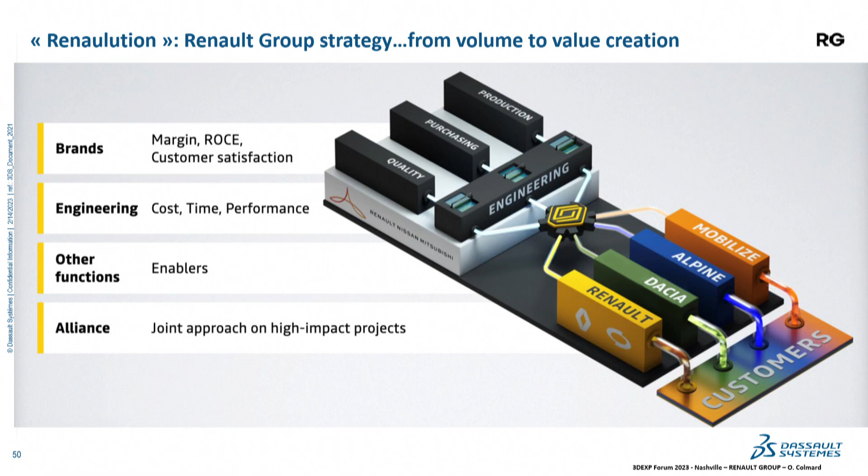700,000 units by 2025. The Renault Group has launched its Renaulution, the new group strategy based on moving from volume to value creation. For engineering teams, the challenge is efficiency in cost and lead time development reduction in order to put time to market at the best world level. One objective is to switch from a car company using tech to a tech company designing cars.

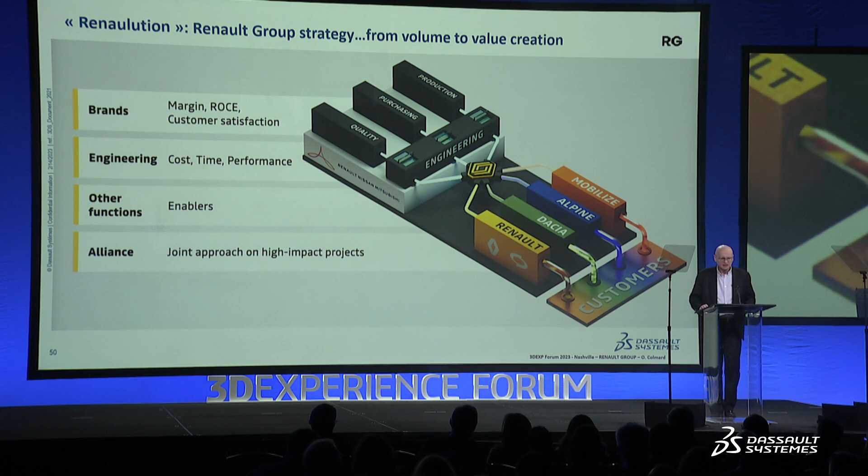In this context, digital strategy is key. We want to be at the best level in the industry in terms of digital twin. This is why our program is called Renaulution Virtual Twin.

With Dassault Systèmes, it's a long journey. We have been partners now for more than 20 years. Pioneer in the 90s with the CAD adoption. In 2010, we launched a huge transformation called New PDM, the first world player in V6 technology. It's a first step to the 3DEXPERIENCE.

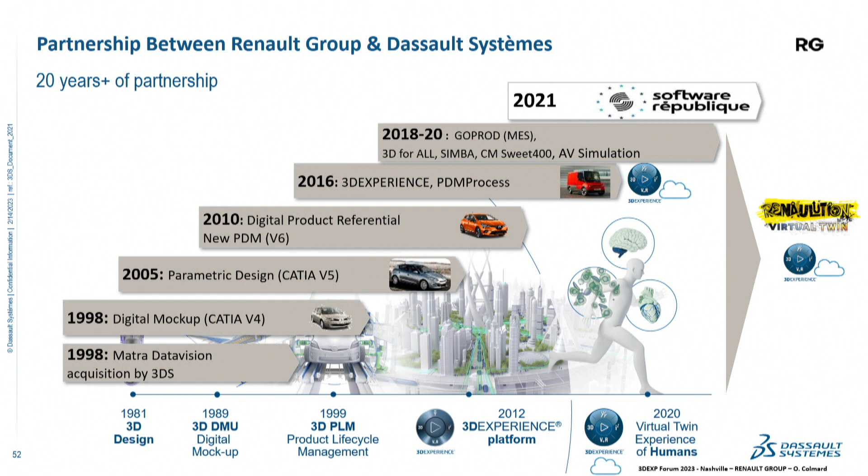And end of 2021, we decided on a new breakthrough with a large adoption of the 3DEXPERIENCE platform on the cloud. Why this transformation? Automotive industry is facing some major challenges.

Switch to EV and new energy, exponential growth of complexity due to systems and software, embedded or off-board, and always higher levels of regulation compliance constraints.

This is why we decided to invest in a strong backbone to manage upstream data, the single source of truth for all métiers. And we build it around 3 pillars.

First pillar is robust and agile product process design. The second pillar is transformation in system and software management, including configuration management and MBSE approach. And the third pillar is collaboration and data sharing.

Another objective is to suppress silos, switching from engineering PLM to a cross-company virtual twin with access to data coming from all the business lines. We want to provide definitively a single source of truth for all the métiers.

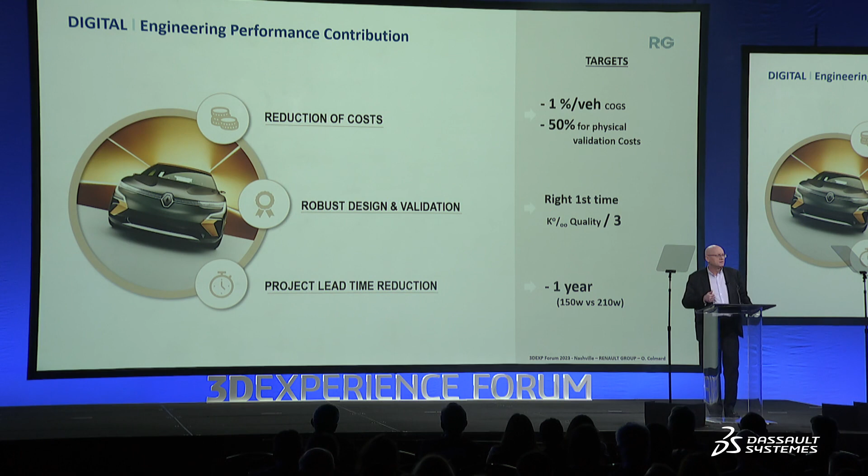We expect a lot of value creation from our digital strategy. Reduce cost with less expensive prototypes, more simulation, less physical testing. This is the shift left approach.

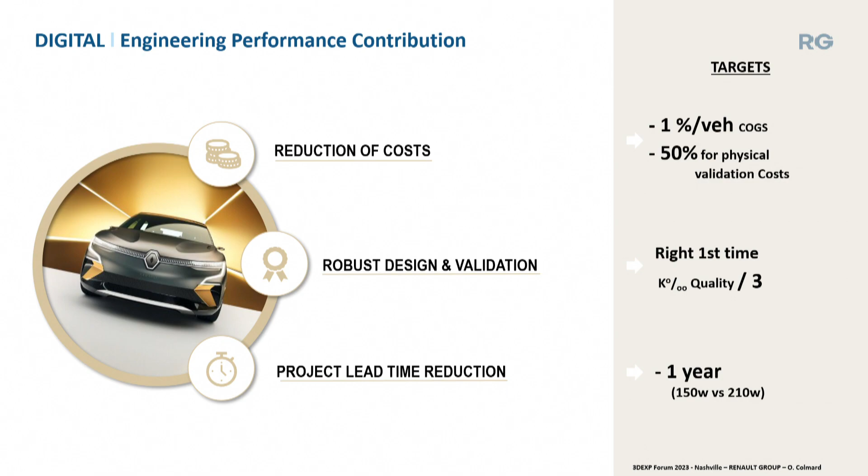We want also to improve quality of design in order to be right first time when you go to the physical phases. We want to contribute to time to market with a drastic reduction of the project lead time, minus 1 year.

How to leverage this value? Let's see some examples from our 3 pillars. If you start with the first pillar, robust and agile product process design, today designing a new car is a 4-year journey from the initial idea to the product.

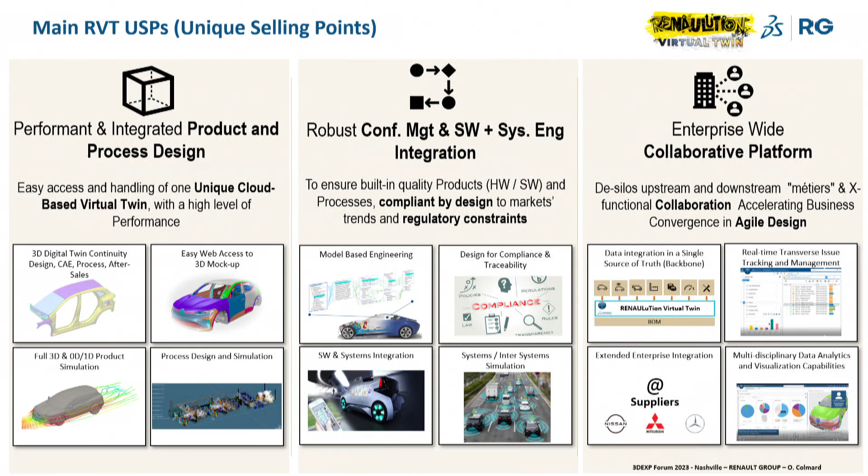Then come the first physical prototypes with the huge investment in tooling after a digital phase. And this digital phase represents 50%. Each problem that you can solve during the digital phase is a huge saving of money and time compared to the late modification. We have many initiatives to reach this goal.

One is 3D for All. Today, if you want to see a 3D representation of the virtual twin, you have to be a CAD or CATIA specialist with a dedicated workstation. If you are not, and if you need the car, you have to ask this guy to show you the car.

The idea is to give this access to all the project team members. All of Renault Group today, all Renault Group range, is already available, and we've trained more than 4,000 people to use this tool. Let's see it in a short video.

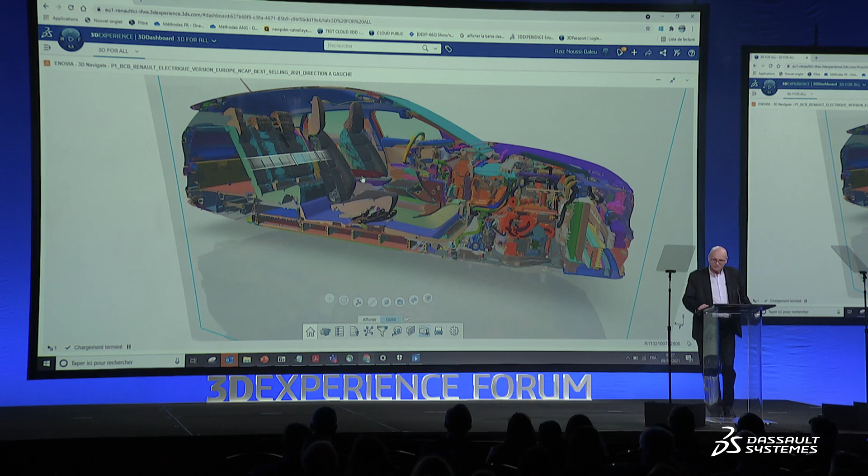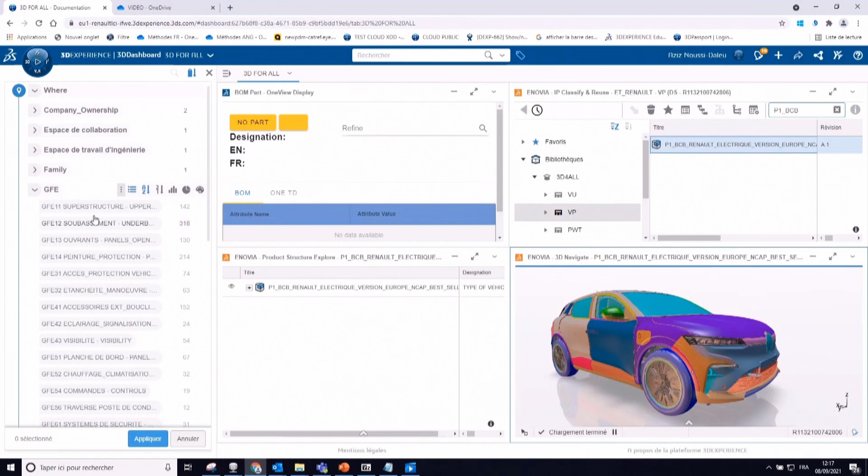So we are in the 3D Experience platform with the brand new Megane E-Tech EV in Europe. In this platform, most of the 3D functions are available. For example, we can make a section view, and the user can choose his environment on a normal PC, using web technology. When you select a different type, you can obtain, in this case, the Alliance CMF-EV platform.

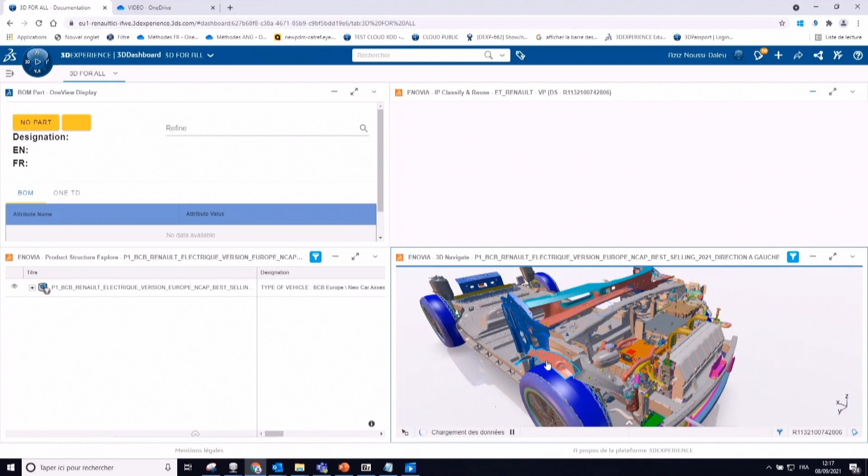With selection of a particular part, I can have access to any information, whether this information is in the platform or not. In this example, I chose some BOM information, bill of material, but it could be quality, purchasing, or costing information.

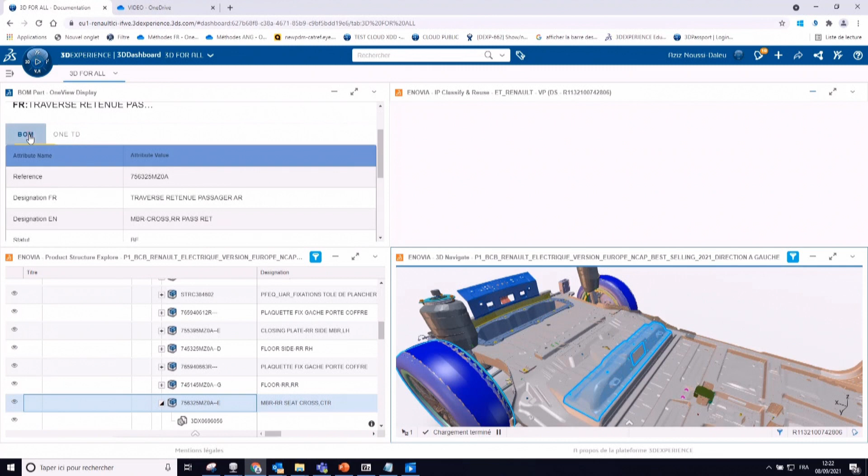For example, if I want to see different information, such as the weight, I can directly access this official information. From the same interface, I also have access to issues.

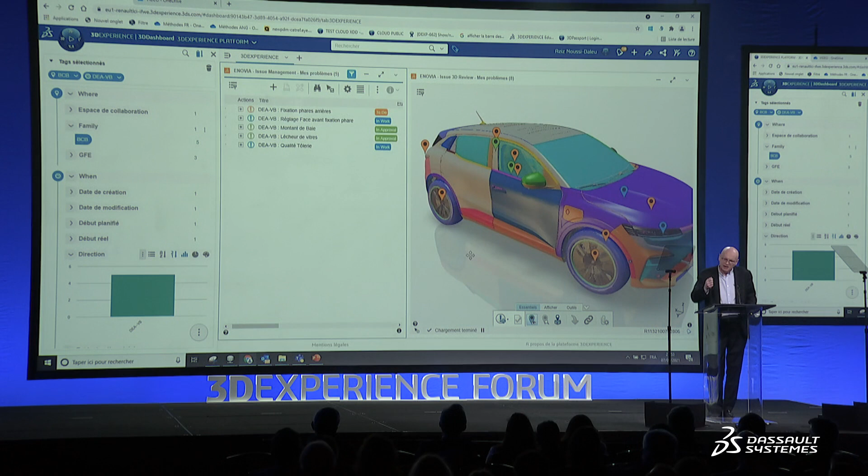With a set of functionality, we can, for example, have the repartition by business line. We can also zoom in on the body perimeter in this case. And as you can see, we can show an illustration of the issue, and we can very easily work together.

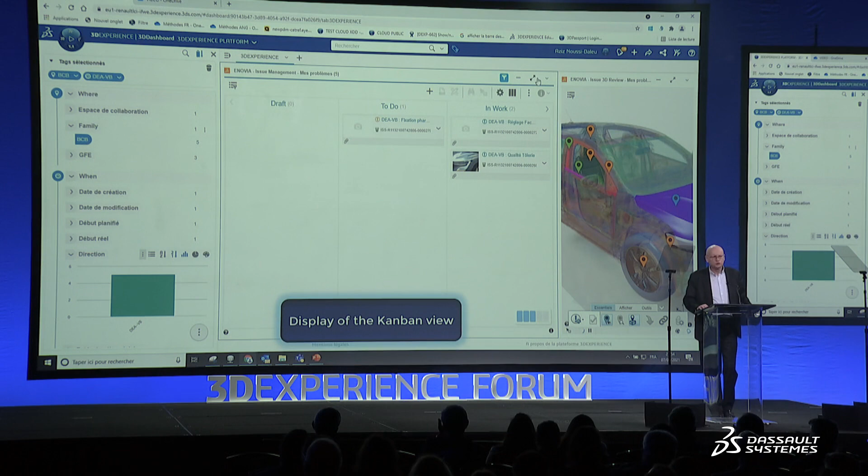We can also have the Kanban view of the issues for all collaborative tasks. So it's a very powerful tool to increase productivity and collaboration between teams. And finally, our Megane E-Tech realistic rendering mockup is done with 3DEXCITE, based on the same CAD data.

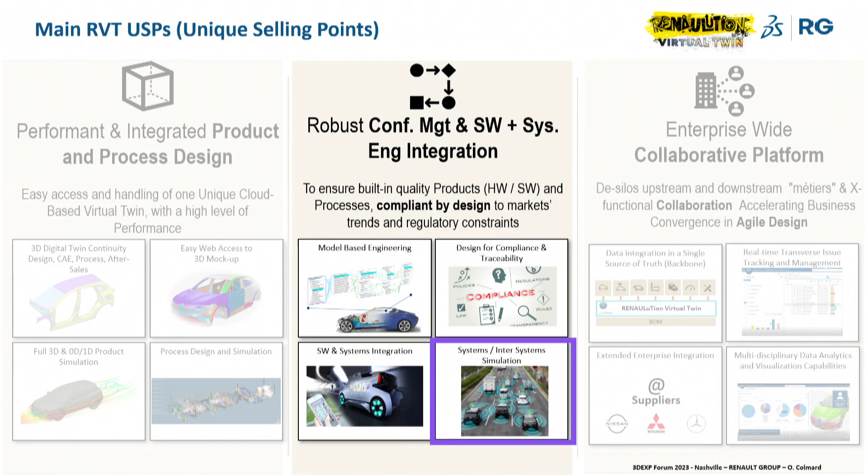The second pillar is system and software transformation. In the car industry, without strong systems engineering and robust configuration management, it's impossible to face new complexity, and impossible to ensure regulation compliance and traceability from requirement to validation and now to certification.

To be sure that your system design is robust, you have to make system and inter-system validation thanks to simulation. This is the objective of CATIA SCANeR from AV Simulation. Let's see a short video.

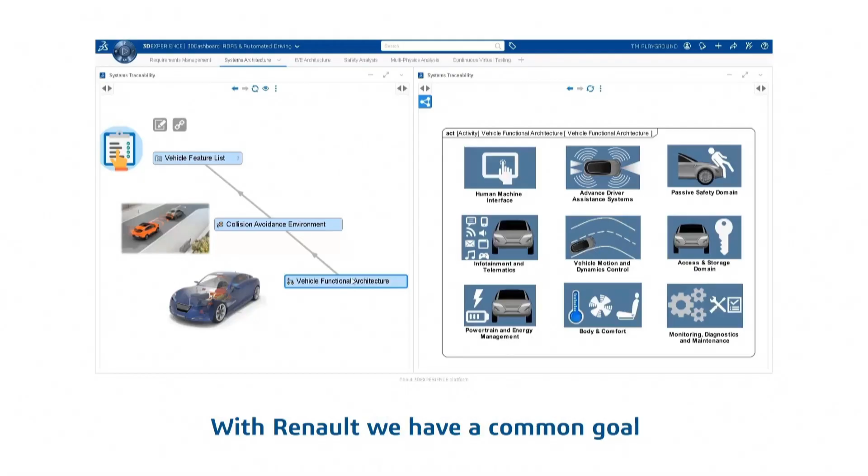Our products become more and more complex with connected, autonomous and electrified vehicles. At Dassault Systèmes, we develop industry solutions for advanced driver assistance systems and autonomous driving development. With Renault, we have a common goal to engineer autonomous systems that will be free of bugs when the real vehicle hits the road.

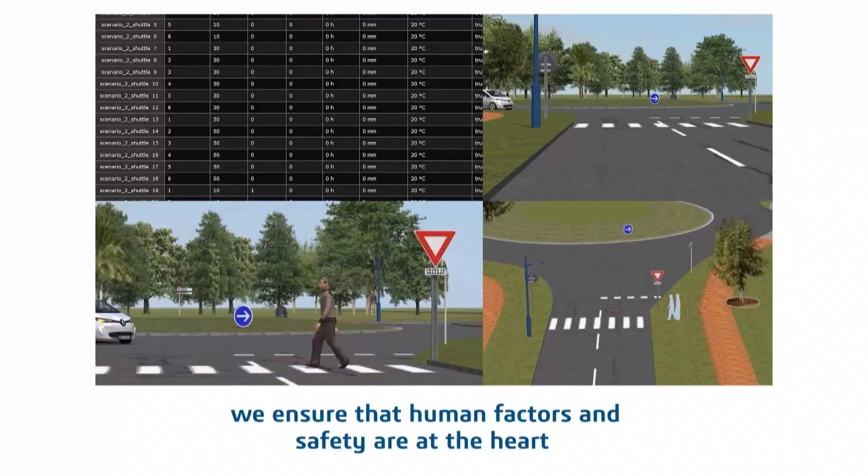We are partnering with AV Simulation to run massive simulations of autonomous driving scenarios on the cloud. AV Simulation builds the most advanced driving simulators. We ensure that human factors and safety are at the heart of tomorrow's mobility solutions.

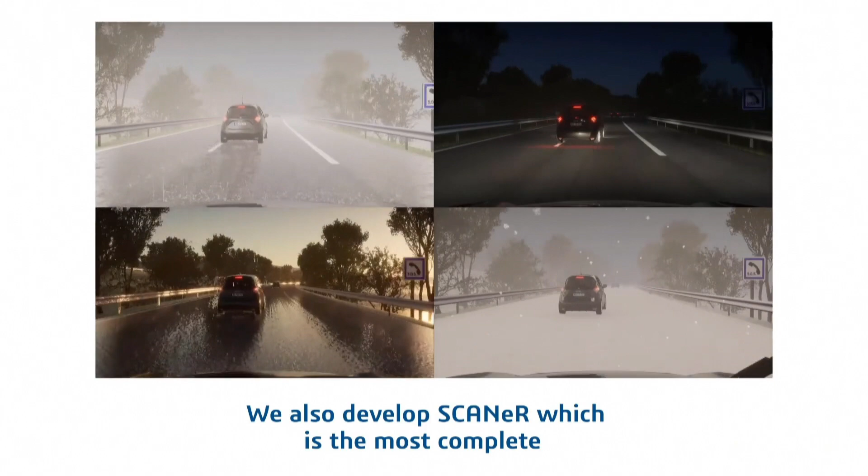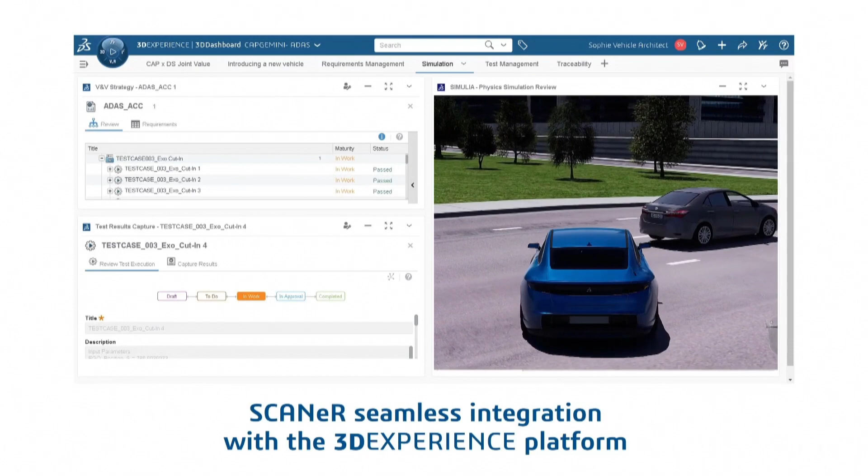We also develop SCANeR, which is the most complete driving simulation and validation software, thanks to its headlights, sensors, traffic, compute, and explore features. We allow mobility players to drive millions of realistic virtual miles to reach first-time-right. SCANeR's seamless integration with the 3DEXPERIENCE platform is a game changer towards digital transformation.

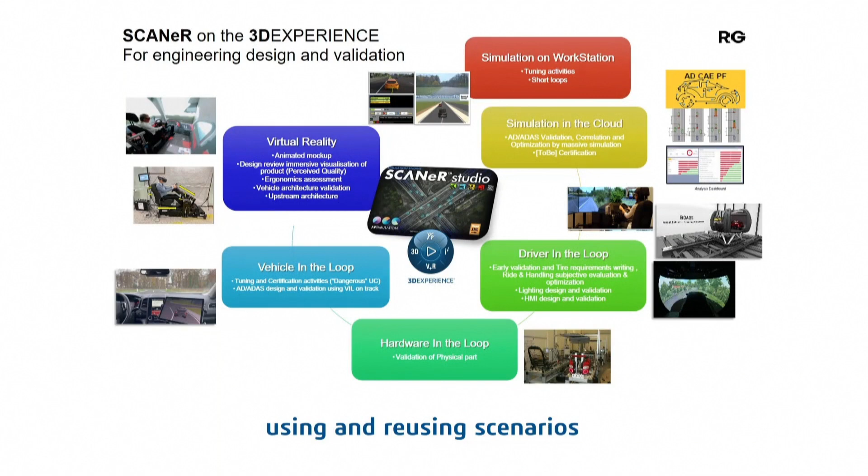Renault and Alliance teams are using SCANeR to support vehicle-level simulation activities. The workflows based on SCANeR enforce a digital thread, using and reusing scenarios as well as running different types of vehicle models. It is used in an agile process for verification and validation with digital and immersive platforms at any phase of the project.

SCANeR, together with CATIA and the 3DEXPERIENCE platform, is the foundation of the compliance of the Renault vehicle digital twin. It creates traceability to run baseline simulation.

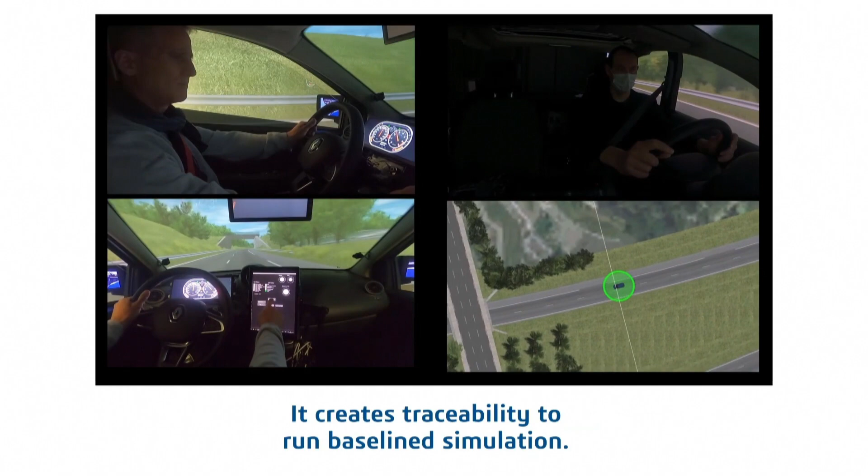The digital chain, based on SCANeR as orchestrator and 3DEXPERIENCE for virtual twin management, is key to design and validate complex systems by simulation. It shifts the effort to early development phases with digital, reduces prototypes by more than 50% in cost, reduces lead time, and finally improves the quality of design and validation for complex systems.

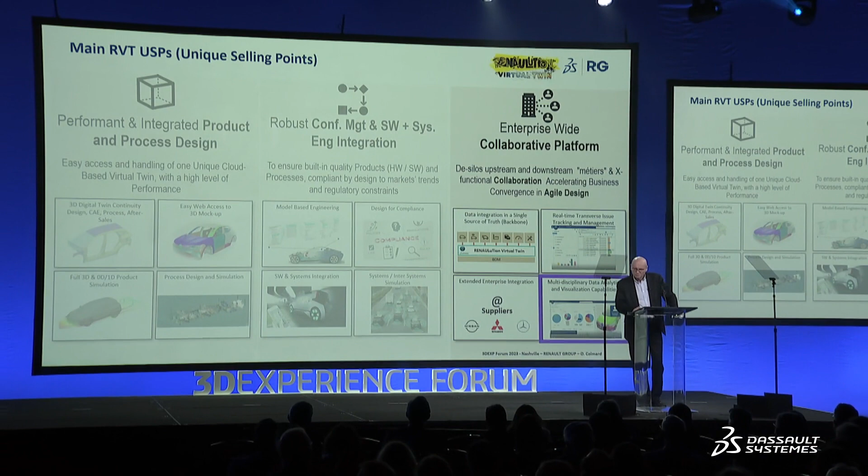So in the last pillar, we manage collaboration and our strategy on data: Extended Virtual Twin, XVT. XVT is a tool based on NetVibes technologies.

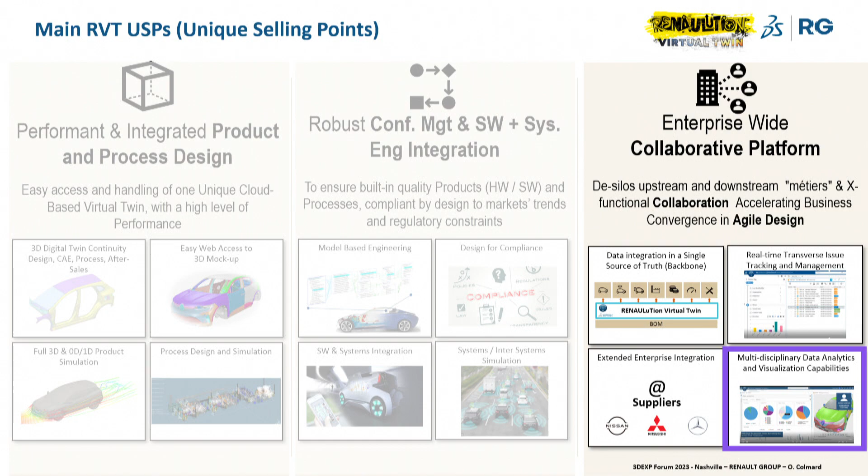The objective is to create a dashboard or cockpit called Data Perspective, mixing on one side data managed inside the 3D Experience platform, including the 3D digital twin, and on the other side, data coming from any legacy tools outside 3D Experience, like purchasing, costing, quality, manufacturing, after-sale, etc.

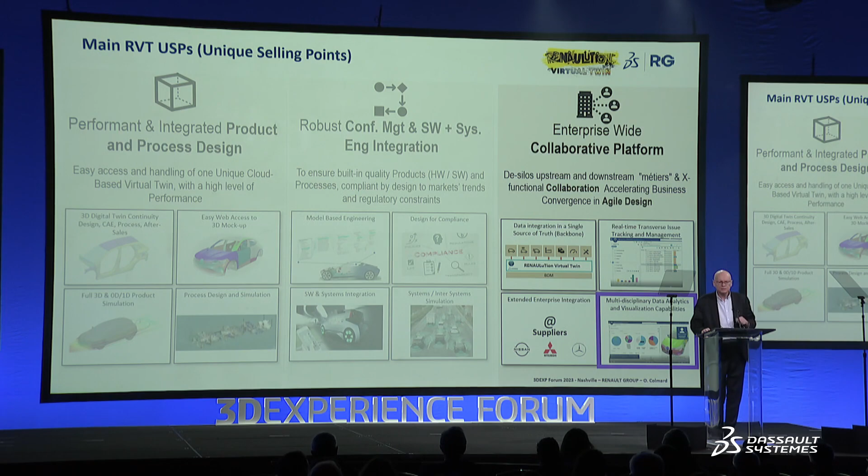I will show you a short video of one of our use cases. We have many others. We call it Digital War Room in Renault. A war room is a cross-company team looking for price reduction opportunities.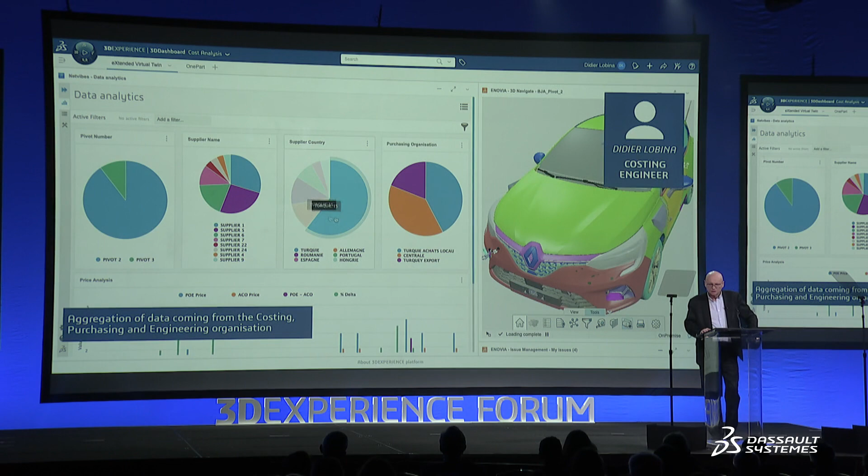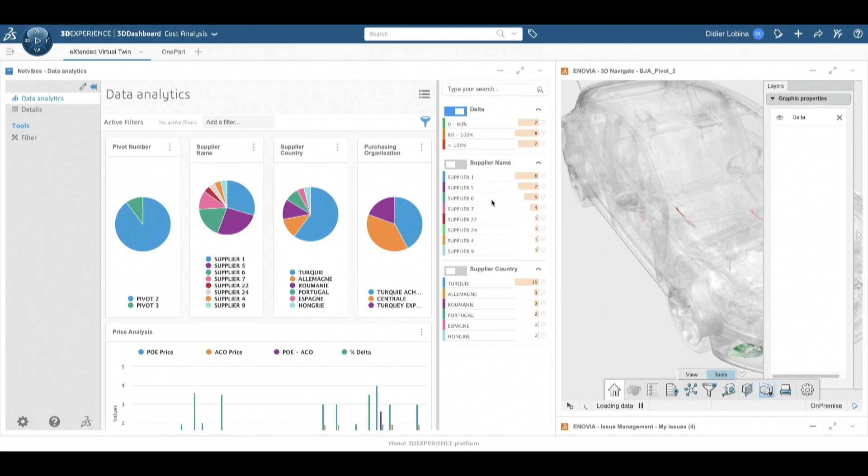So we start on the costing. We are in the costing team, and on the screen, data analytics are on the left, and as you can see, PLM and digital mockup are on the right. The objective of this tool is to track the gap between the real price and the target price given by the costing team.

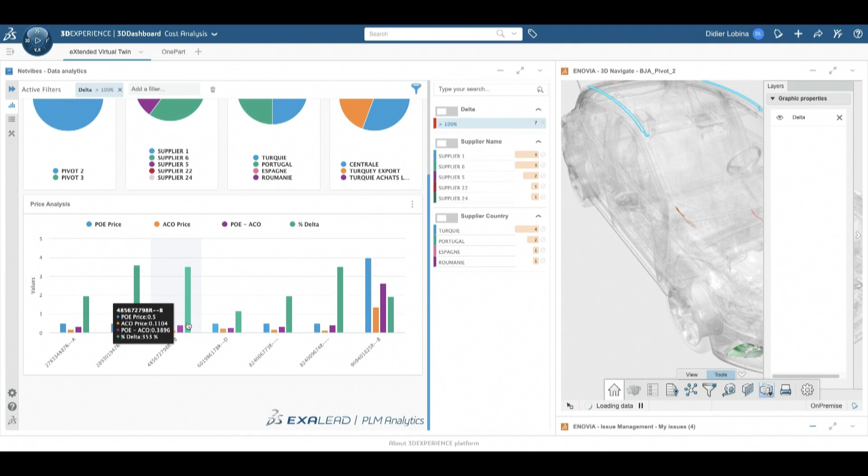Here, I can focus on all the parts with the gap over 100%, for example. I can preview them inside the catalog. Here, I'm going to focus on this door hinge that I want to optimize. I can look at all the parts that belong to the same categories.

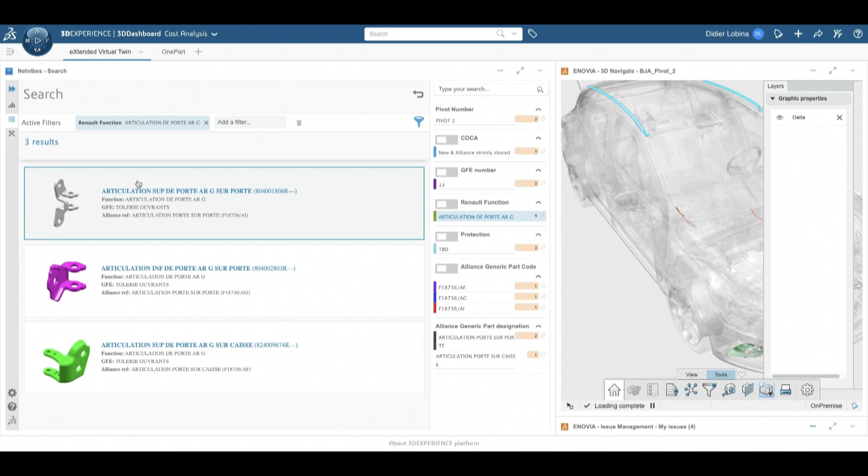And finally, I decide to assign the collaborative task to his engineering colleague, to study a cheaper alternative technical solution.

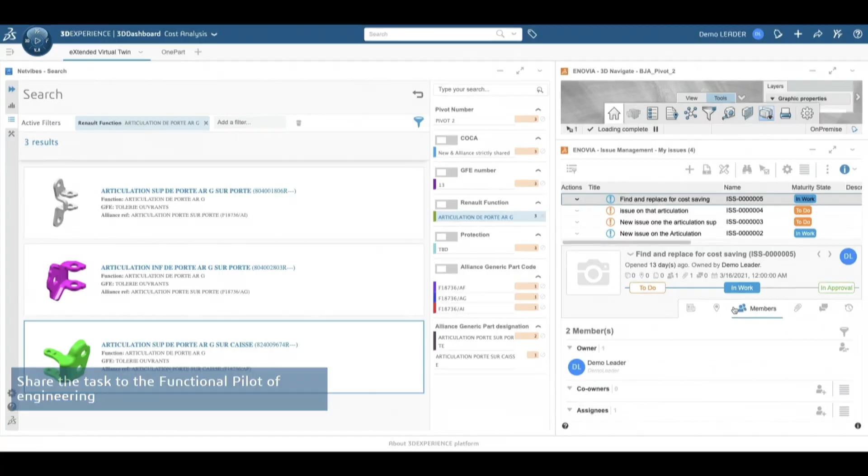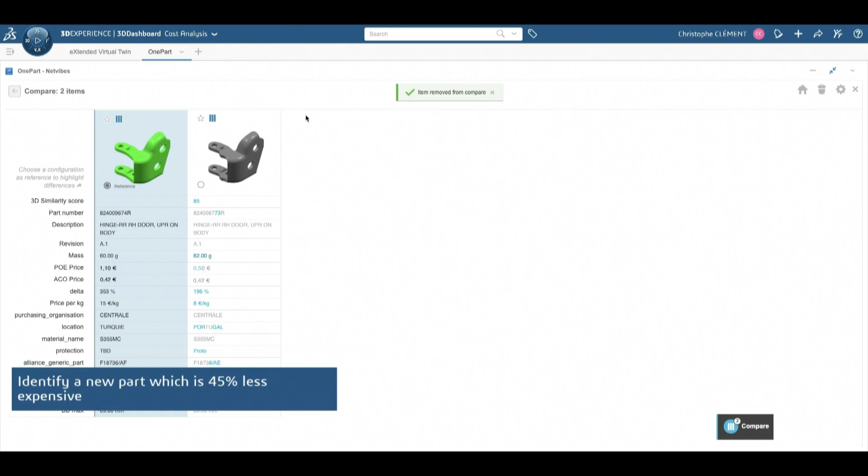45% cheaper. I can verify that from a geometric point of view, and compare the two parts. Finally, the two parts are similar, or quite similar.

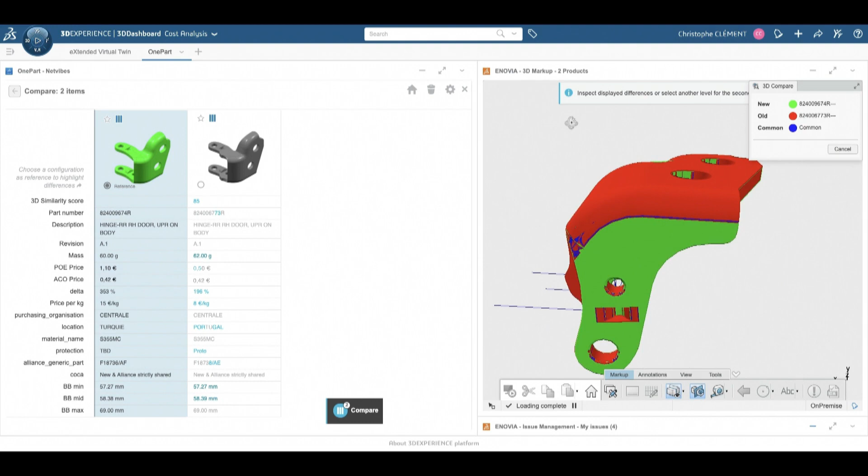Now remains the validation steps. That is to say, to verify that its new support the weight of the doors. I transmit a collaborative task to my colleague of the digital validation, the CAE engineer.

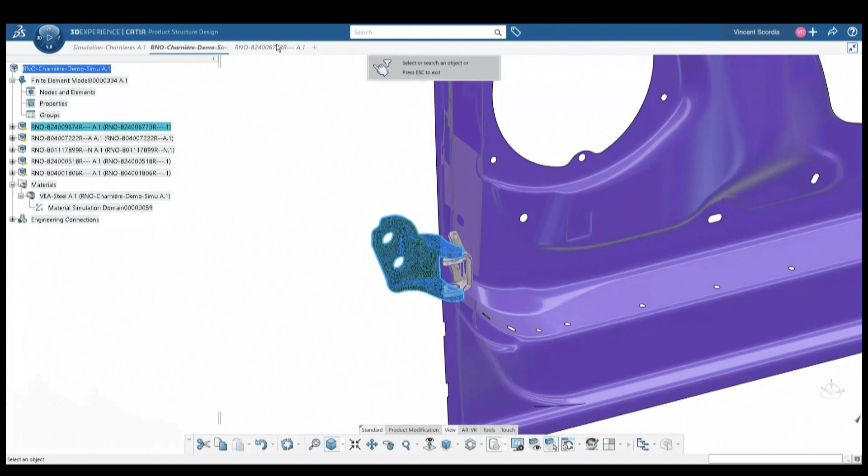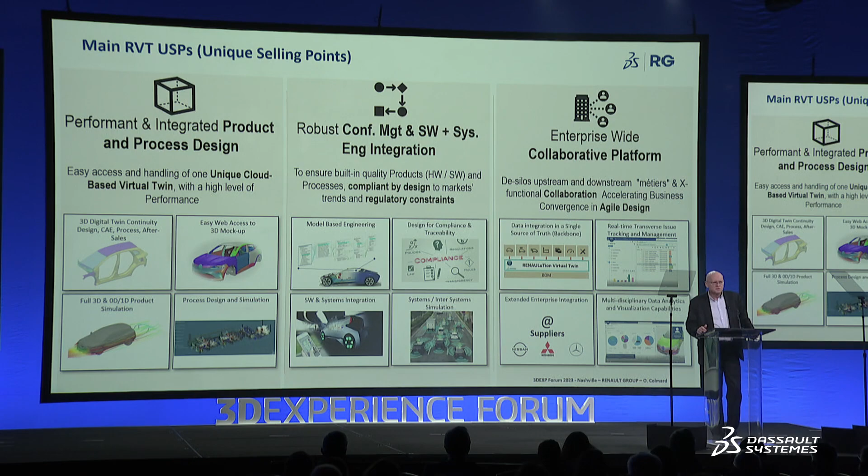As you can see, it's very exciting to mix the legacy data from different business lines with our PLM data, with NETVIBES on its data perspective, in order to create value for each sector. We have a lot of examples of the usage of this technology, and it is very interesting for our company.

So, after 1 year, where are we? Thanks to the cloud, we had set up the 3D Experience platform extremely quickly.

Last year, we developed our first gearbox for hybrid car in the 3D Experience on the cloud, totally out of the box. And we prepare the development of the new car. In January this year, we started a new electric vehicle project, one platform, 3 upper bodies, in the 3D Experience on the cloud.

Today, we have more than 2,800 active users, including 700 designers in CATIA in the 3D Experience on the cloud.

It's a huge transformation for the company, which needs a strong change management and a strong sponsorship. In Renault, Luca de Meo, our CEO, is the sponsor of this project.

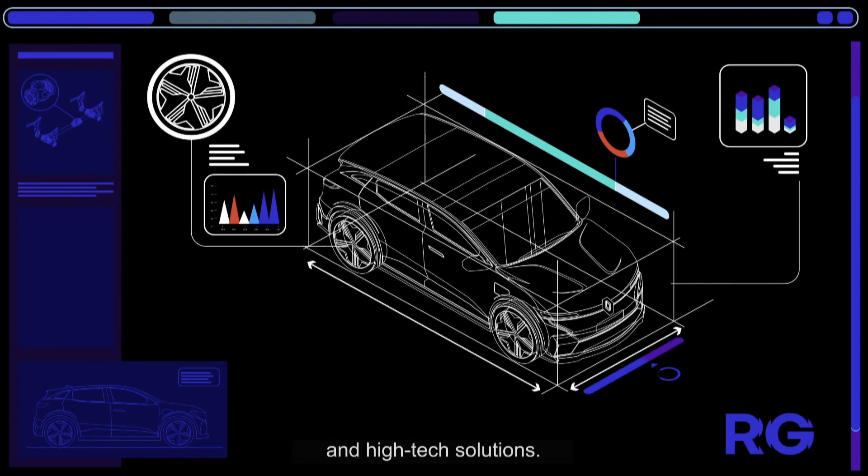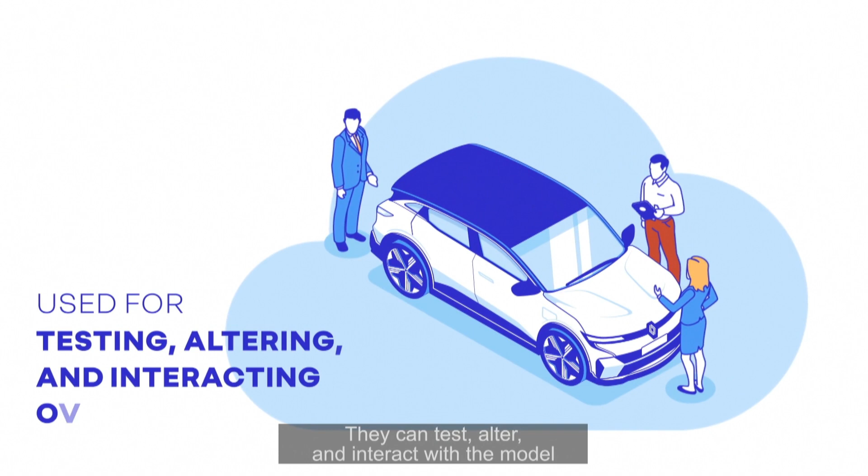All until digital twins hit the scene a few years ago, in which we are now investing to develop powerful tools and high-tech solutions. Ever since then, when designing a new model, we create its ever-evolving digital twin, a virtual model stored on the cloud that all authorized personnel can access. They can test, alter and interact with the model in the shared online space, the company's virtual replica.

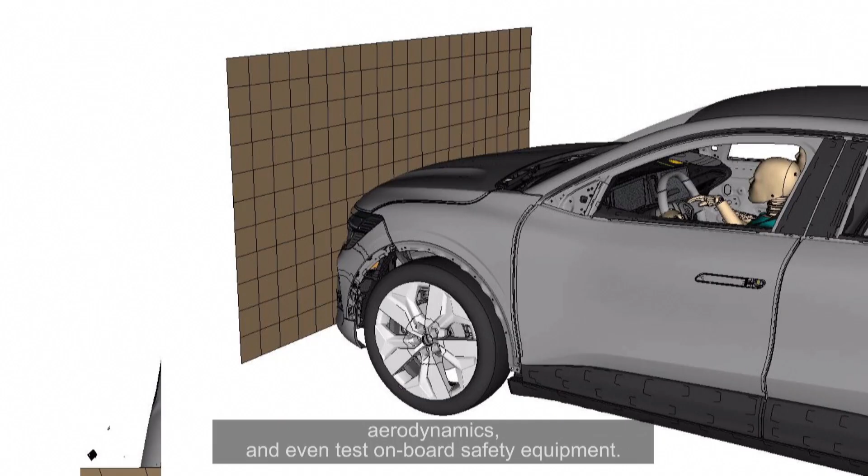But the digital twin is much more. You have the virtual scale model, a 3D object with as much detail as the real thing. Thanks to high-powered algorithms, we can determine a car's handling, aerodynamics, and even test onboard safety equipment. No need to make a physical prototype for every stage, its digital twin is a perfect substitute.

A vehicle is a minefield of calculations. You have to check that everything works as planned. That brings us to part 2 of our twin. Engine settings, ADAS, everything can be done with the twin. Seated behind a driving simulator, test drivers put cars through their digital paces on virtual roads. Safe, affordable and fast, an ideal addition to road tests.

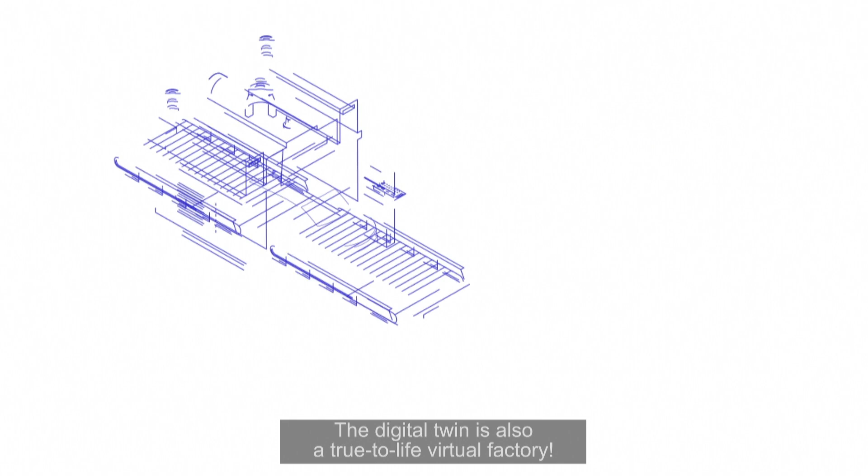Part 3, manufacturing. The digital twin is also a true-to-life virtual factory. Organizing production, sequencing operations, monitoring each part, everything is tested and confirmed via the digital twin for optimal production output.

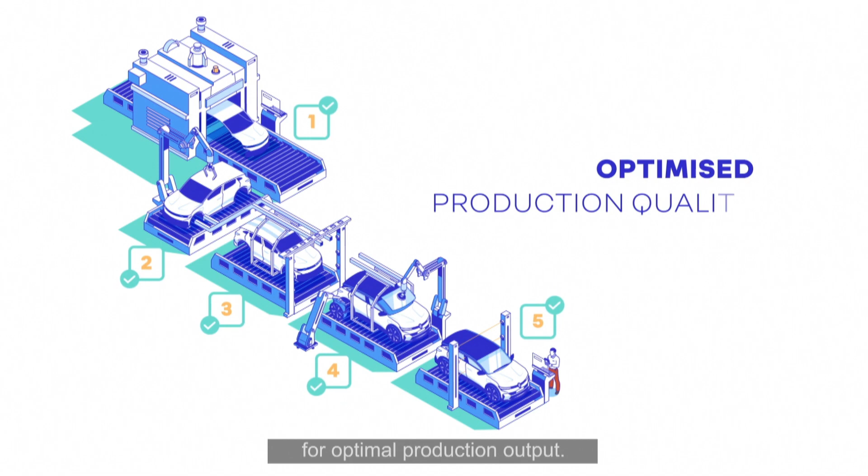Last of all, vehicle monitoring throughout its life and even after its initial purchase. From design through to updates and retrofitting, everyone works together over the cloud. The real-world vehicle and its digital twin constantly learn from each other and feed into each other's design.

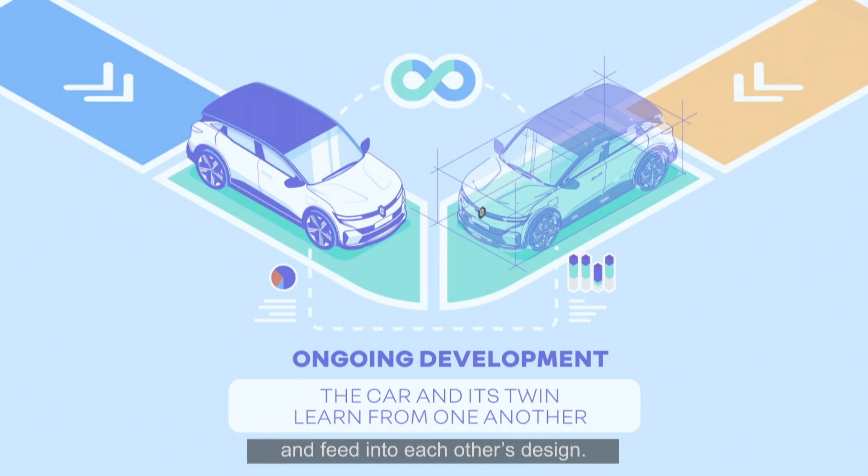And as with the dawn of every new era, we will look back on today in a few years' time and wonder, just how did we do it before we had digital twins?